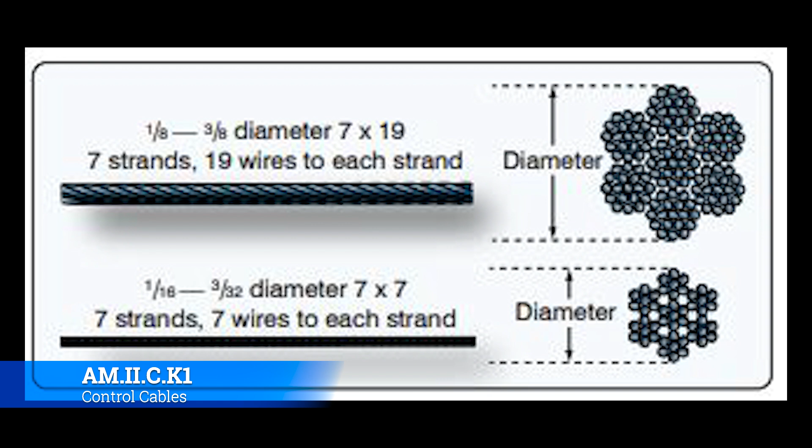However, they are susceptible to a couple of things. One, primarily, is corrosion. That's something you want to look for. As an aircraft cable ages and starts to break down, it will start to fray, just like a braided hose will start to fray. So if you have it off the aircraft, one of the best things to do is grab the whole length of the cable and do like this, go that way and flip it over and do that. You can see if there's a popped cable, it'll pop out. As you do this, watch your hands because they're like needles that go into you.

If it's on the aircraft and set like this, all you really want to do is take a shop towel and just glance over the top of it. That will catch if there's a strand that's popped out, and you'll know that's bad.

Depending on the situation, you can look up the minimums per the AMM for what sort of damage is allowed on that control cable. It'll probably be in the same chapter as the rest of the flight control stuff, and so it may or may not have it in there.

The other way to do it is to just have personal minimums, like you would with flying. Say, if I found a broken cable or broken strand on my aircraft, I'm going to replace the whole cable. I'm not going to take a chance, because if that aircraft is flying and you lose some sort of control, there's nothing you can really do. You're basically in a metal coffin, hoping you have enough control via the engine or whatever to get it on the ground safely. But the likelihood is that you're not going to make it out of that situation. Flight controls are something you just don't want to play with, so have a really high standard for flight controls in general, especially control cables.

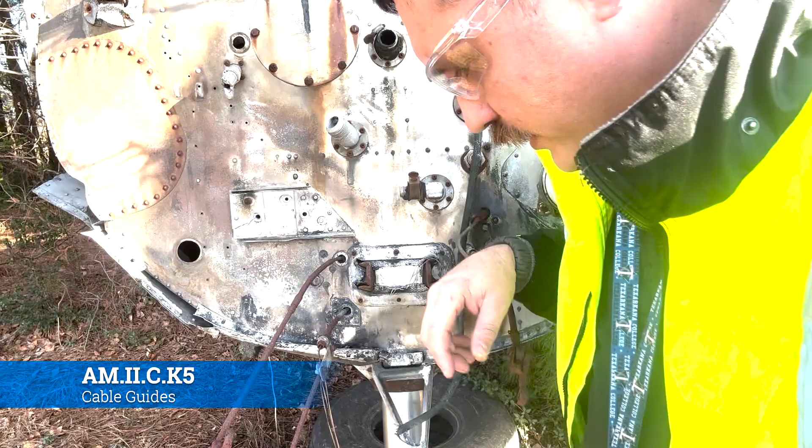Okay, cable guides will come in a variety of different shapes, forms, and fashions. We'll put up a graphic from the 8083 where you can see it. Here's a real life example of one.

This is going to be a throttle cable for the engine that used to be on the Beech 18. You'll notice that it has a guide that attaches to a metal standoff, which makes sure the throttle cable is routed correctly.

Then it goes through a pass-through in the fuselage, or in the firewall, so that the throttle guide or throttle cable doesn't rub on anything.

You'll get a lot of the same thing in control cables as well. Cable guides are something that you want to pay attention to.

Most cable guides, the vast majority of them, are there to keep the cable from touching anything else. Sometimes they come in contact, but by design they're usually not meant to sit there and ride on it. If the cable is riding on it, you need to start checking alignment and making sure it's under the right tension.

Because if it's under the wrong tension, it's going to slacken, or maybe get brought up and touch something it's not supposed to. If it's out of alignment, then you've got a pulley somewhere that's not set right, and that could lead to a situation where, under the right conditions, the cable pops off that pulley, breaks something, or breaks itself.

So the cable guides are usually really good, kind of like canaries in the coal mine, letting you know that something's going on, something's wrong. So you might want to look at that.

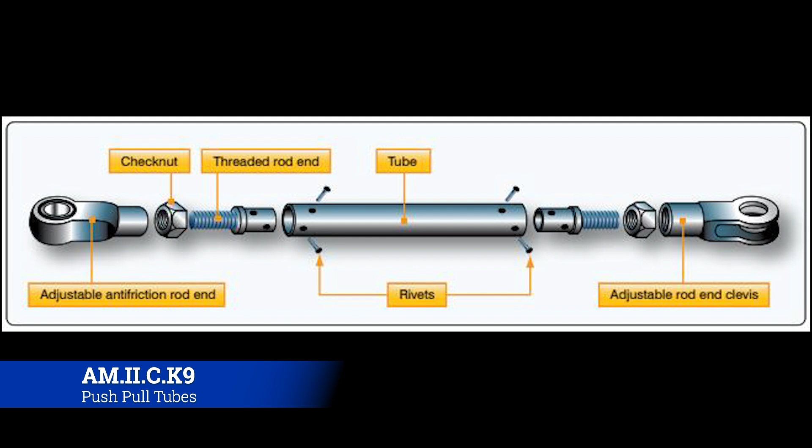Now, the way they typically work is that, let's say you're in an OH-58, a Bell 206 helicopter. You're going to push forward on the cyclic, and when that pushes forward, it's going to go into a series of bell cranks or intermixing flight controls that then pushes on a tube that then goes all the way up a broom closet that then pushes on other bell cranks that either go directly to the swash plate that causes the controls to move, the actual flight controls to move, in that case the blades to move, or it's going to go to a hydraulic actuator that gives a mechanical advantage to that small movement that then goes up to the swash plate and causes it to move.

So generally speaking, it will always go control input, push-pull tube, to the actual flight control surface itself. So this is how they typically will end up working. You'll end up having the pilot, who will then actually put a flight control movement in, however it works, into a push-pull tube, and then it will connect directly to a flight control surface.

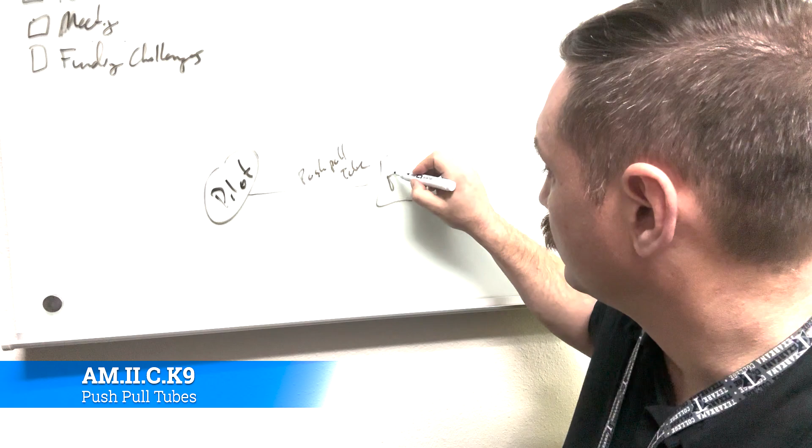Now, in between here, that push-pull tube might encounter bell cranks, intermixing flight control devices that allow for other control inputs to be put in, or it might go to a hydraulic actuator. It might go to a computer of some variety, but then it allows different things to happen, or different detections.

Now it's pretty straightforward. If I have, let's say that's a push-pull tube, and I push on this side, on the right side, I'm going to push it. What happens to my other finger? All right, there is no lag. There is no any sort of adjustment that needs to be made once it's originally installed. It's not going to get shorter. It's not going to get longer. That's it.

Now, it does have a disadvantage that sometimes in certain flight configurations, the power or the weight that could be on a said flight control would be extremely difficult to overcome with just your own human strength, which is why we use hydraulics a lot of times to supplement that power. But that being said, at the end of the day, it still relies on you to push it forward.

Now, where this kind of came into play is the first 737 MAX crash. One of the things that came out is like, well, they could have just pulled out of the dive. Well, the amount of weight that was actually on that yoke at the time would consist of you having to sit down in a chair and then pull 200 some odd pounds to your chest that way. And most people can't do that.

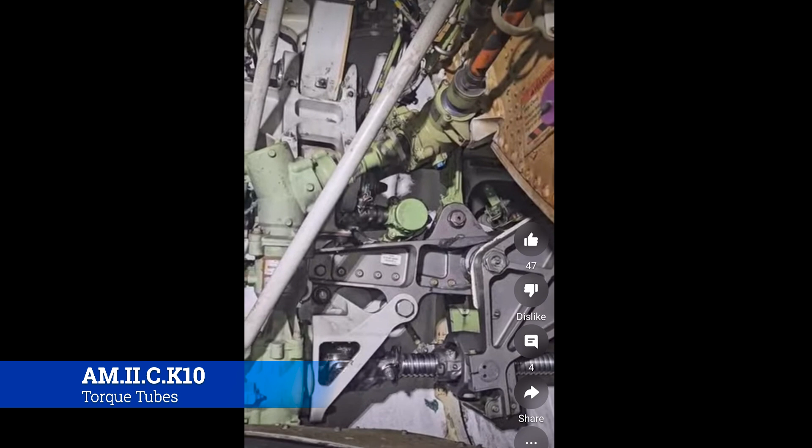All right, it's a 737 flap transmission in action. The tube we want to pay attention to is in the top right-hand corner, denoted by that yellow or orange and black tape. Notice what the torque tube does as it spins perpetually, that's working out to the flaps and lowering them incrementally as needed, as you see here. Notice that the torque tube spins.

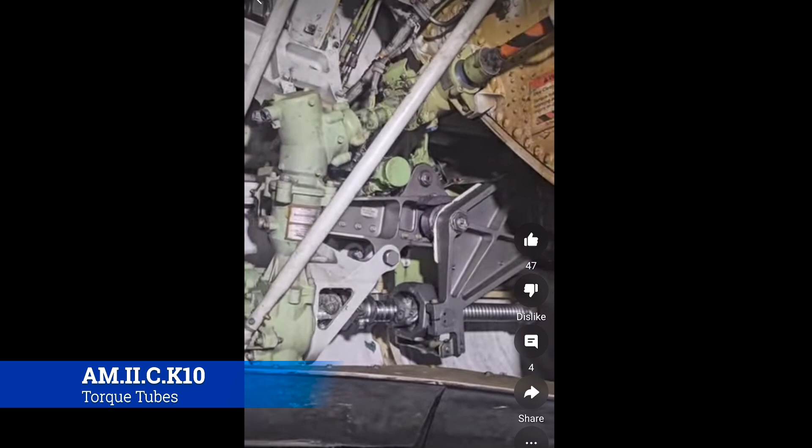It goes into a series of, well, they're not bell cranks, but they're transmissions, and on the bottom that jack screw actually pushes the flaps the way they need to go, and that is how a torque tube operates. The thing to take away is that it just spins at a higher or lower rate. It takes the inputs from the cockpit and turns them into a torque action that is then converted to some sort of linear action elsewhere on the aircraft. Most commonly you'll see this in the flap track, but it could be in any number of other places depending on the design of the aircraft. But that's a torque tube.

Now, the dynamics at play with flight controls can lead to some unique situations, such as flutter, or a flight control being out of balance, say because it got painted or whatnot. So what do we need to know about that?

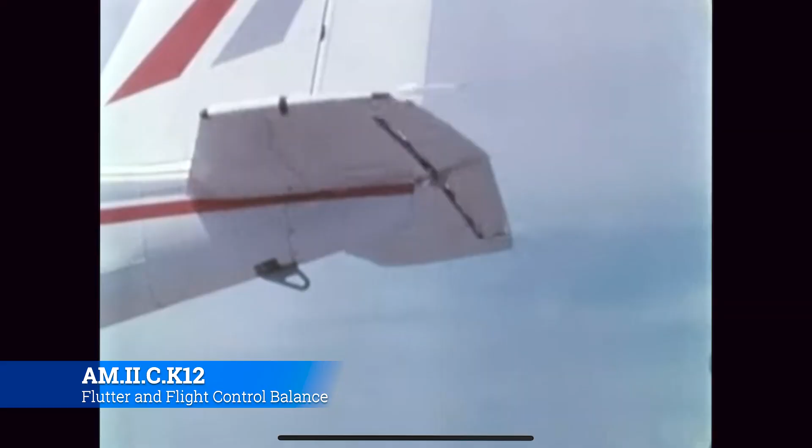Okay, so this is what a fluttering flight control looks like. The elevator on this plane has just gotten away from the designer, mechanic, or pilot, and it's starting to oscillate uncontrollably. Flutter, by definition, is a rapid and uncontrolled oscillation of a flight control surface on an aircraft caused by a dynamically unbalanced condition.

Now, you can think about this if you're familiar with pulling a trailer. Let's say you were to put a lot of the trailer's weight on the very end, behind the axle, and all of a sudden you jerk the steering wheel going down the highway at 70 or 80 miles an hour. As that trailer starts to come back and forth, reacting to your control inputs, it starts to jerk uncontrollably one way or the other. As it goes back one way, it makes the action-reaction even worse coming back the other way, until eventually something has to give. It can't just keep on building on itself that way.

In that metaphor, what ends up happening is it rolls the vehicle, or snaps the trailer, or crashes in some way, shape, form, or fashion. Now, with a flight control surface, what will eventually happen is that the aircraft will lose its vertical or horizontal stabilizer. It'll just break off and be gone, and the airplane will crash.

So in the design phase of an aircraft, this is one of the things they try to make sure can't happen. They set up the flight control so that flutter just won't happen, and then they test for it during flight test. One of the biggest tests they do is a flutter test, where they try to induce flutter as much as possible in a controlled test procedure to see at what point the flight controls will begin to flutter on a certain aircraft. Then they back-engineer that and say, don't operate at this airspeed in this way, so on and so forth, to keep the pilot from inducing a fluttering characteristic into the plane.

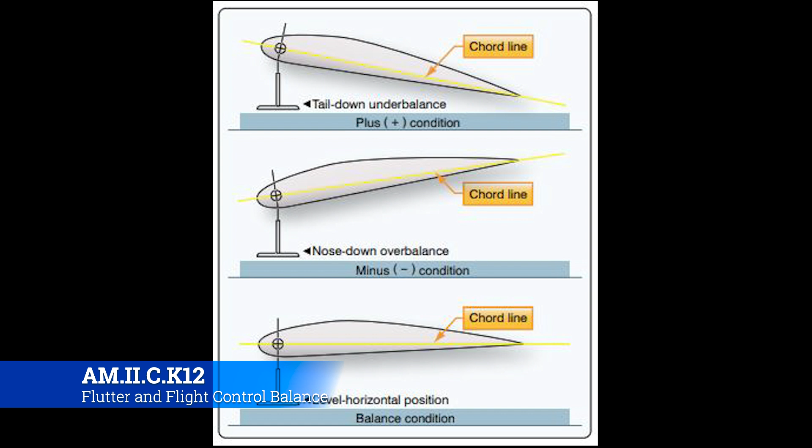A tail-heavy condition, which is a static underbalance, causes undesirable flight performance and is not usually allowed. Better flight operations are gained by a nose-heavy static overbalance, and most manufacturers advocate for a nose-heavy control surface, meaning that it wants to dive on you.

Let's talk about underbalance and overbalance. Say you have an airplane flying along, having a grand old time, and you have an overbalance. It means it wants to pitch down like that—the trailing edge wants to come up and push the nose down, so it goes down.

We want that. Why? Because if the airplane is flying along and it's underbalanced, it wants to come up like so, and then something happens, and the natural tendency of the airplane is to pitch up like this. This is how you stall an aircraft—it'll go up, stall, kick over, probably go into a spin, crash, and kill everybody.

If it's overbalanced as it's flying along and something happens causing it to nose down, the airplane still wants to fly, because it'll nose down, pick up some airspeed, want to climb, and then bleed that airspeed off. As it bleeds the airspeed off, it'll want to nose back over, and it'll just keep porpoising like that. This gives you a lot more time to recover from that condition, or to wake up, or whatever caused it, rather than just going boom, dead almost immediately.

That's true with everything, including balancing of flight controls. A flutter in the flight controls is caused by an out-of-balance condition, which makes the flight controls flutter like that. Eventually, that almost always results in a structural catastrophe—it basically breaks off and falls apart. And that's why flutter is so bad.

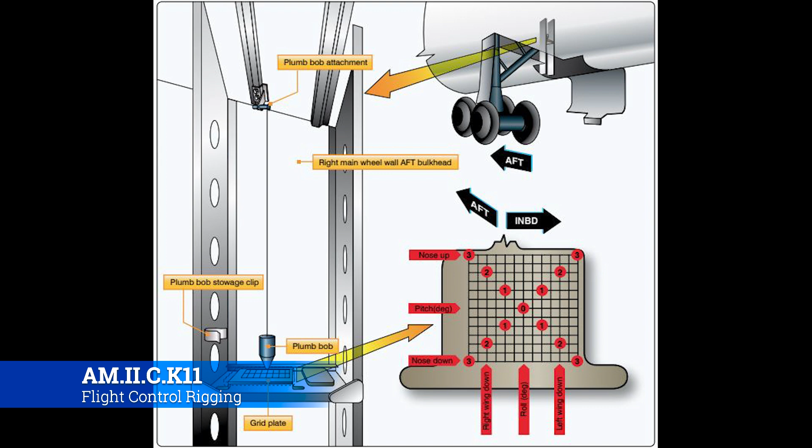If the nose is a little bit high, you're going to lower the nose jack just a little bit to cause that plumb bob to swing back aft. Same thing if the tail is high—you just keep making those little adjustments until you get the aircraft centered. Once it's centered, we're ready to start doing checks to see if it actually meets the requirements for the maintenance manual. All of these aircraft are different and all the procedures are going to be different, but this is just a notional high-level overview of how to go about checking the structural rigging.

Now, once the aircraft is jacked and leveled, there are different ways you can check for structural alignment and rigging angles. Some people use special rigging boards that incorporate a special instrument like a spirit level or an inclinometer for determining the angle on some aircraft. On a number of aircraft, the alignment is checked using a transit and plumb bob, or a theodolite and sighting rods. It just depends on what era aircraft we're talking about and what the procedure is in the maintenance manual.

When checking alignment, a suitable sequence should be developed and followed to be certain that checks are made on all the positions specified. They typically include wing dihedral angle, incidence angle, verticality of the fin, engine alignment, symmetry check, and horizontal stab incidence or dihedral.

The only time I've ever actually done this in real life is whenever we were installing a new tail boom on a helicopter. We would check and make sure the tail boom is aligned to the helicopter, usually through a series of shims on the mounting bolts right there, and we were able to shift that one way or the other.

And the reason why we did that is because it had to be within a certain tolerance, because we ran the helicopter tail rotor drive shaft down that tail boom. So if it was off a little bit, bad things would happen. I never saw one out of alignment crank up, but I'm sure it's nothing good.

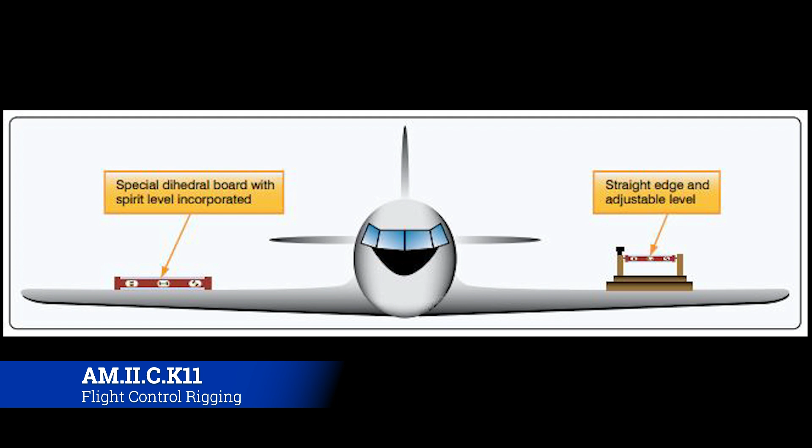That's often what will end up happening - you'll have special tools for definitely the bigger, more complex aircraft, a special tools kit that you'll have to come up with. But if not, you can always use a straight edge and an adjustable level, and you get to where you know the aircraft is level, and then you adjust as needed. It really comes down to whatever the maintenance manual calls out, and you just follow that.

All right, so incidence. Incidence basically refers to the angle between the chord line and the ground or whatever the relative plane is. Incidence is usually checked in at least two specified positions on the surface of the wing to ensure that the wing is free from twist.

A variety of incidence boards are used to check the incidence angle, and some have stops at the forward edge, which must be placed in contact with the leading edge of the wing. Others are equipped with location pegs, which fit into some specified part of the structure. The purpose in either case is to ensure the board is fitted in exactly the position intended. In most instances, the boards are kept clear of the wing contour by short extensions attached to the board.

So, here's an example. The maintenance manual will tell you to produce either this tool or this set of tools. A lot of times you have to manufacture like a wood part, and you'll set the level up on top of these wooden manufactured parts, and you'll run it up and down the wing at different points to see if the wing is twisted at all.

Now, effectively, if the wing is level and then the level is level, they'll match up. But if you get to a point where the wing is twisted, and it wants to turn one way or the other, then you'll start to see, oh look, the wing is warped, and that means the wing's basically no good - you're probably going to end up replacing it. At the very least, you'll be reworking it pretty intensely. So you'll just run that up and down, and you'll start to see the bubble move one way or the other.

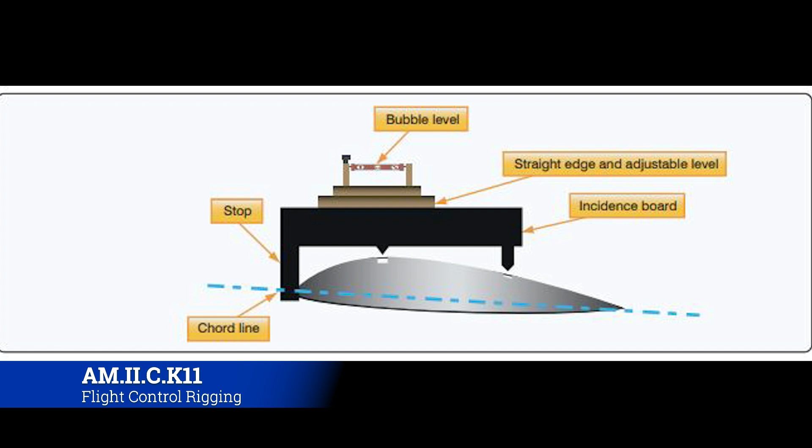This isn't too terribly different than checking the concentricity of the shaft. The tooling is radically different - instead of using a micrometer, you're using a level, and the level's not going to be as precise as the micrometer, but it's going to effectively tell you the same information. They're going to say, hey, look, this thing is twisted and it's going one way or the other. It's not supposed to be, but that's how that works.

Now, a lot of these aircraft, you attach the vertical fin to the aircraft. It's not necessarily part of the original substructure that it's built up from - rather it's a separate device altogether, and you come and attach it to the plane. So whenever you attach something, there's going to be shimming and all kinds of stuff that needs to happen, and you might end up seeing that this plane is flying weird because the vertical fin is out of whack, and we need to check the alignment of it.

And you come to find out, yep, it is out of alignment, and now we need to make some adjustments. That could be simply just taking the shims off, putting new shims on, or whatever, to get it to where it needs to be.

Same thing with the horizontal stabilizer. A lot of them are attached, or they're part of the flight controls in general. You have a stabilizer where the whole thing moves. That could be a rigging problem. It's not necessarily a structural problem that you need to fix. But either way, this is how you go about checking that.

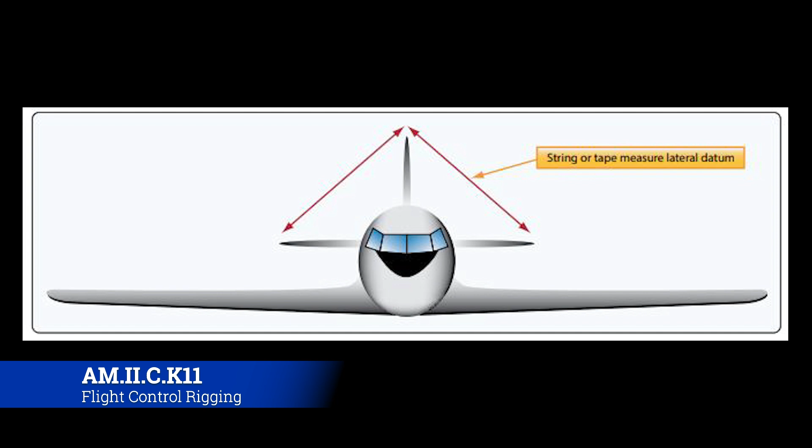Notionally, once again, every aircraft is different, every maintenance manual is different. All right, lastly is engine alignment.

Now, this is actually probably the most common one that you'll do, because you'll end up hanging engines. So one of the checks that could potentially happen, depending on the type of aircraft, is to make sure that the engine's aligned correctly. You wouldn't think it, but just a half inch of being out of alignment one way or the other could have massive ramifications for the way that aircraft flies, where the exhaust goes, all kinds of things. So being in line is really important.

So in this example, you have a four-engined aircraft that has gotten new engines put on it, and then you're going to end up measuring from different places to make sure that the aircraft is actually symmetrical. It's also a symmetry check, but also checking that the engines are lined up the way that they're supposed to be. And if they are lined up correctly, that's a known distance from different points on that engine to the fuselage.

So if it's off one way or the other, you can very well bet that the aircraft's not going to fly right. And even if they do manage to get it off the ground and get it flying, it's going to probably stress the aircraft in ways it wasn't certified for, and so it's going to develop all kinds of issues later on. So you definitely want to make sure you get this right. But once again, the maintenance manual will walk you through all of these structural rigging checks if they're required at all.

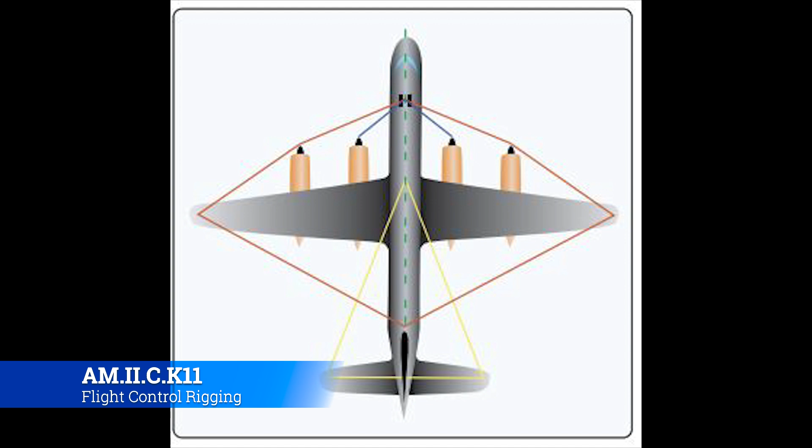All right, so once we've determined that the aircraft is aligned structurally, we're ready to start actually rigging the flight controls. Probably one of the most common ways that you're going to rig flight controls is simply by checking the right cable tension, ensuring that the cables are routed the correct way per the AMM, per the IPC.

It'll lay out and say, hey, this is where these cables should go. And then you're going to turn around and say, okay, well, now that we know that the cables are there, are they under the correct tension, yes or no? So this is an example of a tensiometer. There's a bunch of different kinds out there, this is just one of them. We have this style here, and we also have other types as well.

So on this one, a riser or plunger is pressed against the cable to form an offset, meaning that riser comes up and pushes up on the cable, and then you have two anvils on either side that hold the cable down. What it's measuring is how much force it takes to push that riser up to get a certain level of deflection, and that level of force is then indicated on the face of the tensiometer itself. So that will tell you it's at 35 pounds, 40 pounds, 100 pounds, or however many it needs to be.

Now, the other component of this tensiometer is the table on the bottom side. If you'll notice, on this example it says riser tension in pounds, so 70 pounds on the riser means different levels of pressure depending on the cable size. A 5/32 cable, 70 pounds on the riser means 30 pounds of actual pressure on the cable itself. But if it's a 3/16 cable, it means 42 pounds of tension. And you have to always remember that.

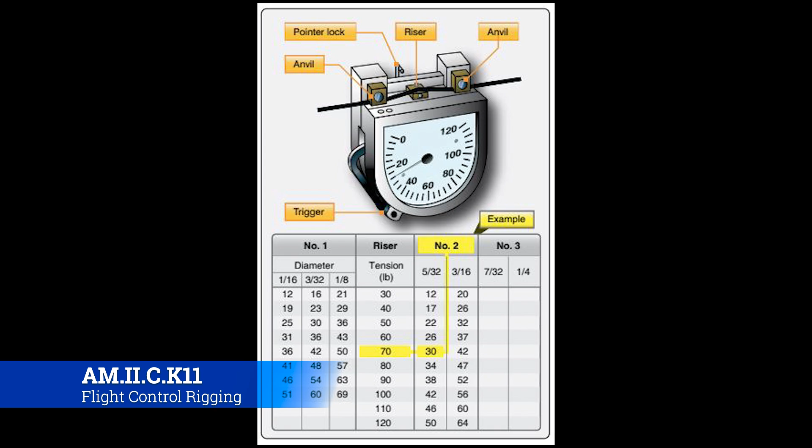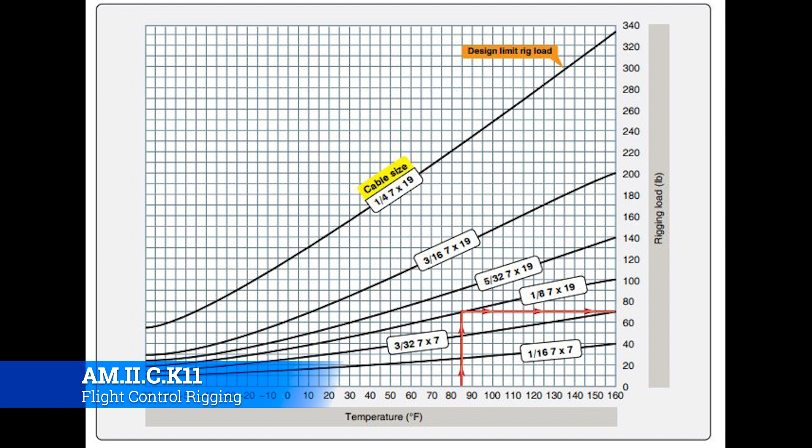So you need to make sure you're rigging it correctly for the ambient temperature that's there, and also keep in mind when troubleshooting any flight control issues, that if the aircraft came from a really cold environment to a really hot environment, or vice versa, these things will play a part. Typically, modern aircraft have ways to compensate for this, or indicate that the cable tension has changed, or it's adjusted on the fly based on how the autopilot systems work. But if they don't, like an old Cherokee 140, you need to keep this chart handy and understand exactly what the temperature is doing to those cables. This is usually included in the maintenance manuals to help mitigate this risk factor.

Okay, so the last component of all this is understanding how to set the control surface travel correctly, or at least check it. At full stops, the control surfaces should only be able to deflect so many degrees, and you'll check that with the propeller protractor. Now this comes in two different forms.

We have digital versions of it now, as well as the old bubble levels. Out in the wide world, depending on where you go and who you're working with and what their budget is for tooling, you could get these or the digital ones. Ironically, the digital ones are actually a lot cheaper than the old school propeller protractors. Now, granted, the old school ones are actually a lot more reliable and accurate because they just use basic physics, and it is what it is. You can't really get too far off, honestly. Whereas with the digital ones, you'll have to be a lot more diligent with your calibration, because they can throw off.

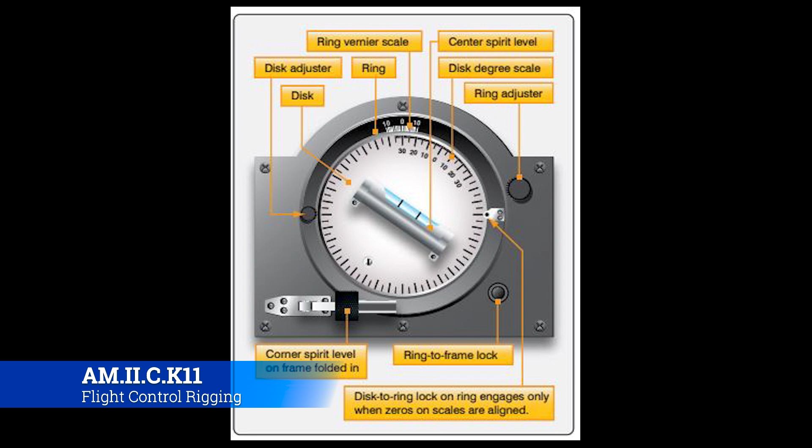But essentially, all you're really going to do is put the flight control at a set level of deflection based on the control input in the cockpit, and then put the propeller protractor on there and make sure that it indicates the right level of deflection. Now, your flight control travel is largely going to be dictated off of the maintenance manual, but more primarily the TCDS.

Every aircraft's TCDS will tell you, hey look, the aileron travels from this to this, the elevator travels from that to that, the rudder, and so on. So if you ever get lost or confused, can't find a maintenance manual, or want to check that the aircraft has been rigged properly, the TCDS will tell you this model should be rigged in such and such a way. And that's a known quantity for every aircraft model you come across.

So just take the TCDS, do your flight control travel checks per the AMM, so that it's done correctly, and there you have it. That is how you rig flight controls on an aircraft.